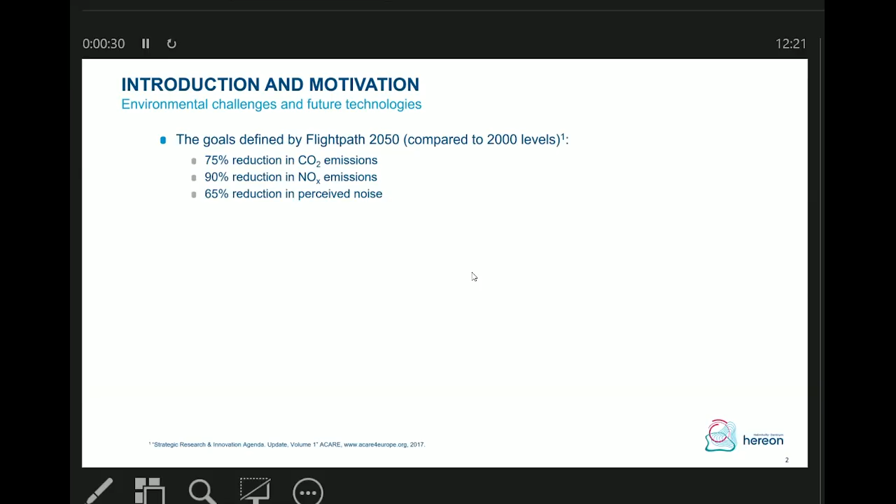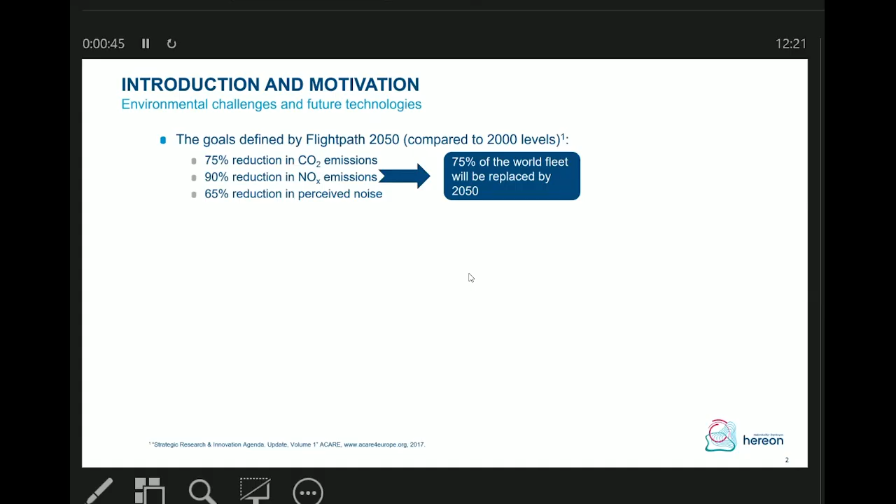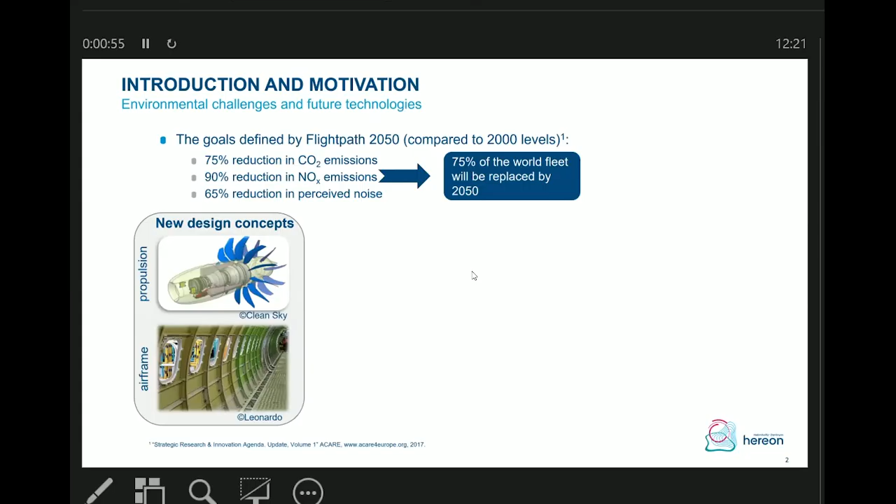One of the challenges is implementing sustainable aviation. There are goals to reduce emissions, meaning 75% of the world fleet has to be replaced by new designs for propulsion systems and airframe structures. This can be done using innovative materials with higher strength, lower density, and innovative processing technologies such as laser-based techniques for joining, additive manufacturing, and residual stress engineering.

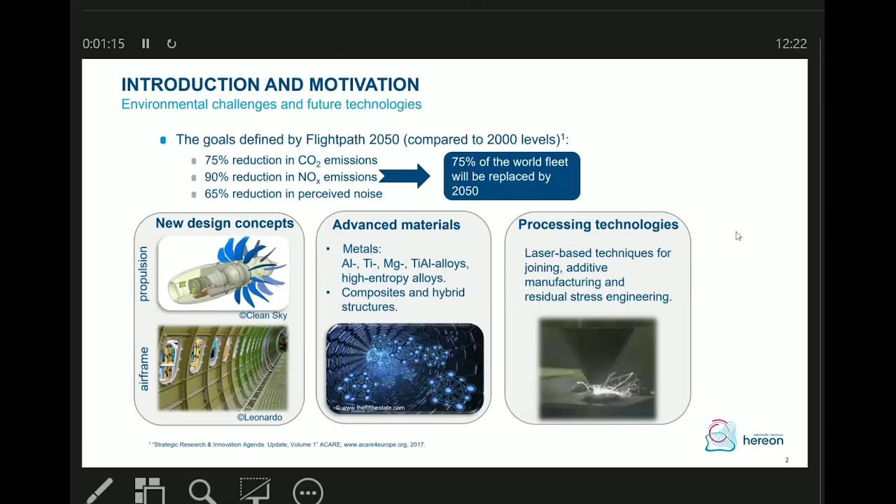And exactly, the laser processing of metallic materials is the focus of activities of my department.

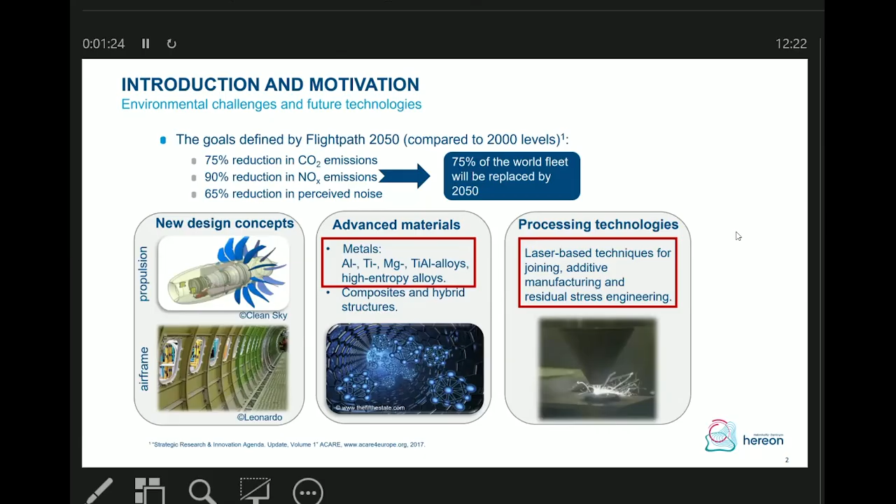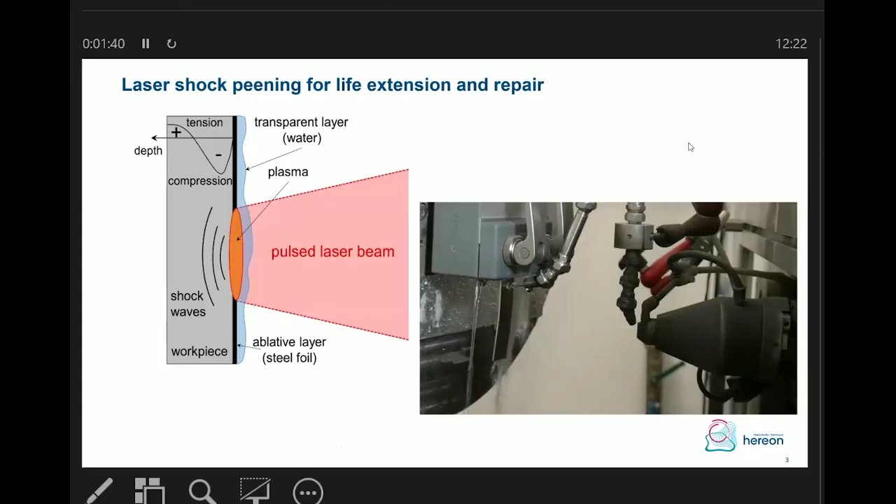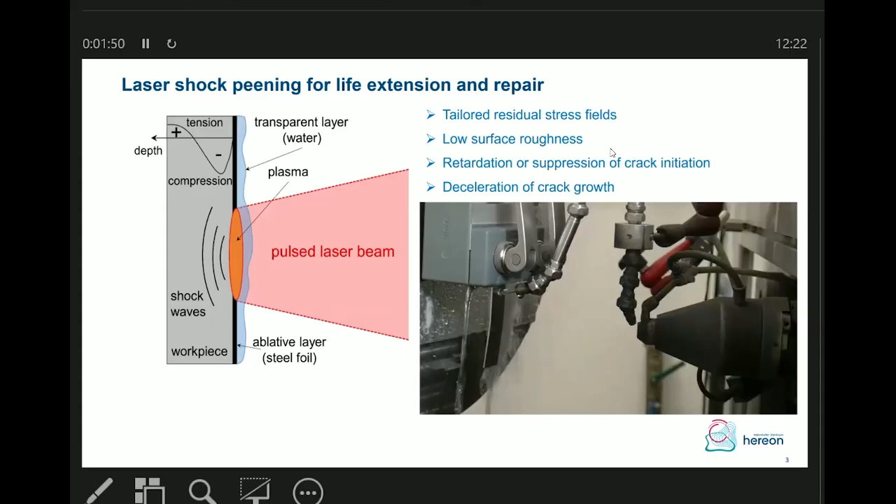The process of laser shock peening was already explained. Here is one motivation using our experimental facility. We have a high energy laser, and here is, for example, the treatment of thin metallic waste. The process can be effectively used for retardation of crack growth or retardation or suppression of crack initiation.

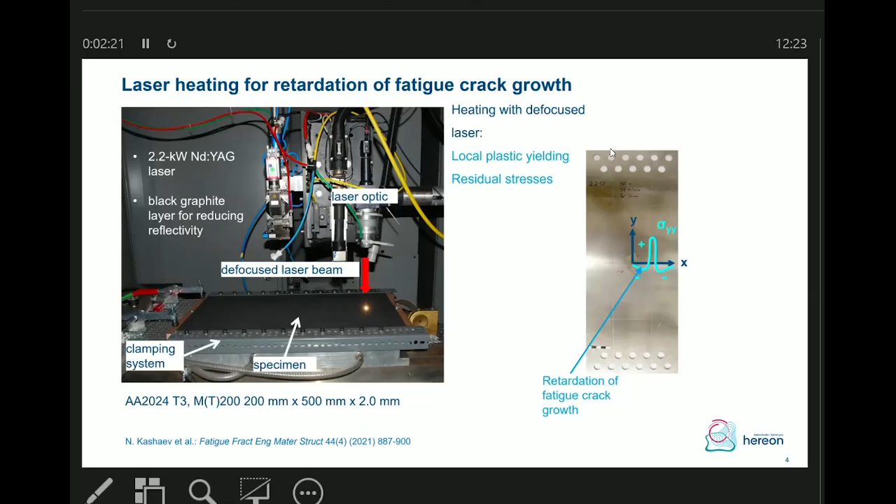The idea is to apply these processes for retardation of fatigue growth. If every manufacturing process is to be applied for industrial applications, we need reliable modeling approaches to predict the effect of the processes, to understand how we can optimize the processes, and to understand how we can implement and optimize residual stress design.

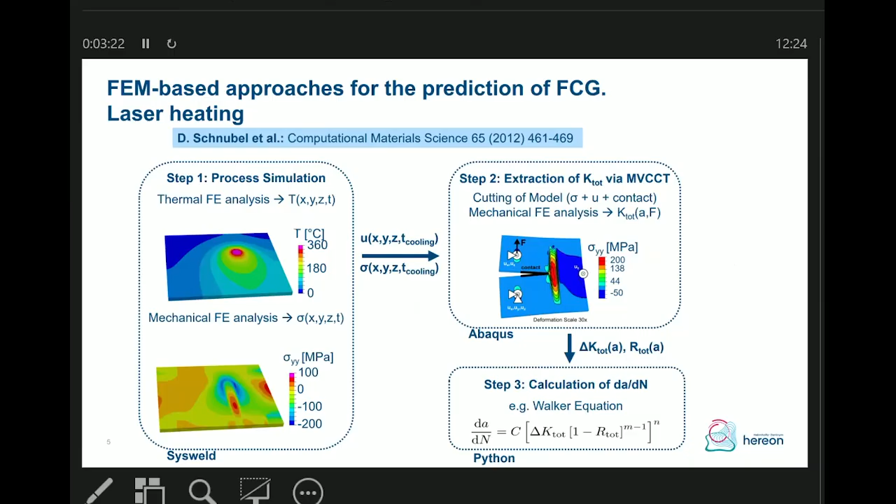With regard to modeling approaches, in principle different modeling approaches exist. One classical way, for example for laser heating, is to first perform thermomechanical analysis to calculate residual stresses. Then you can introduce residual stresses in the fracture mechanical analysis, calculate stress intensity factors, and use empirical equations to predict fatigue crack growth.

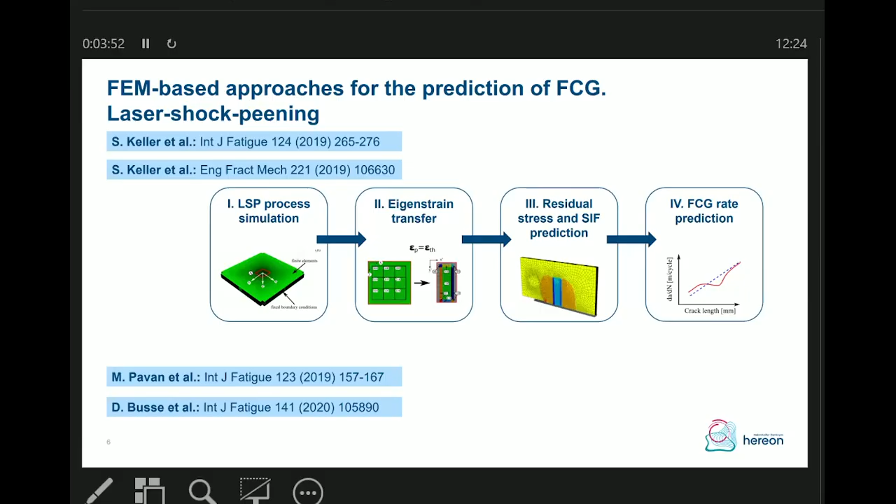For laser shock peening, a similar approach can also be implemented. However, we first have to perform laser peening process simulation, for example using the Johnson-Cook model. Then we can introduce residual stresses in the finite element model, followed by a similar fracture mechanical analysis and prediction of fatigue growth. There are some papers where this approach was successfully implemented.

However, engineers working for the aeronautical industry are interested in using commercial software such as AFGROW or NASGRO, where analytical approaches are implemented for including the effect of residual stresses. In such software, typically residual stresses are accounted for using the weight function method.

Therefore, the motivation for the current study was to investigate whether we can successfully model fatigue growth using the weight function model, the weight function approach. As application cases, we investigated both processes: laser heating and laser shock peening.

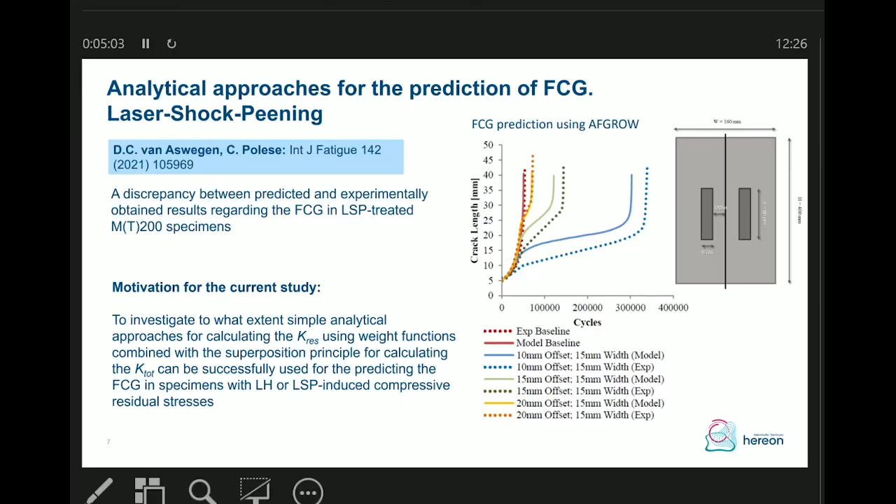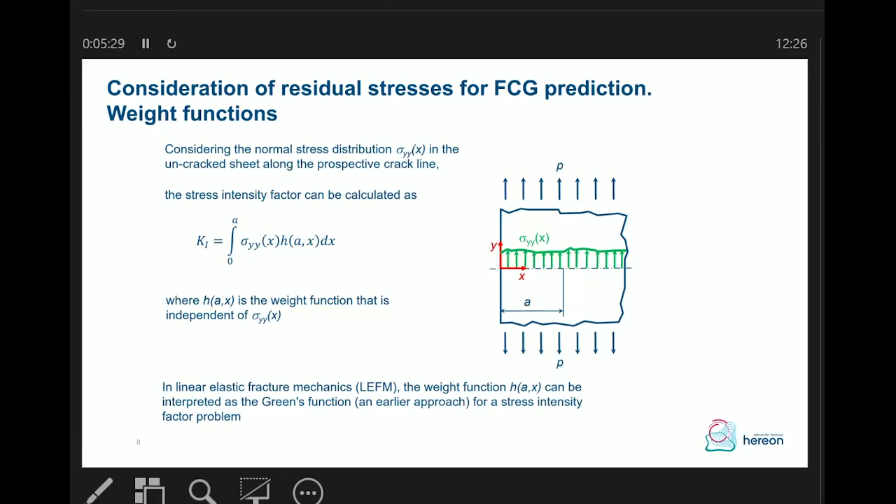The concept is in principle simple. In linear elastic fracture mechanics, the weight function can be interpreted as a Green's function, an early approach for a stress intensity factor problem. If you know, for example, the residual stress profile of the specimen, using integration we can calculate the stress intensity factor due to the presence of residual stresses.

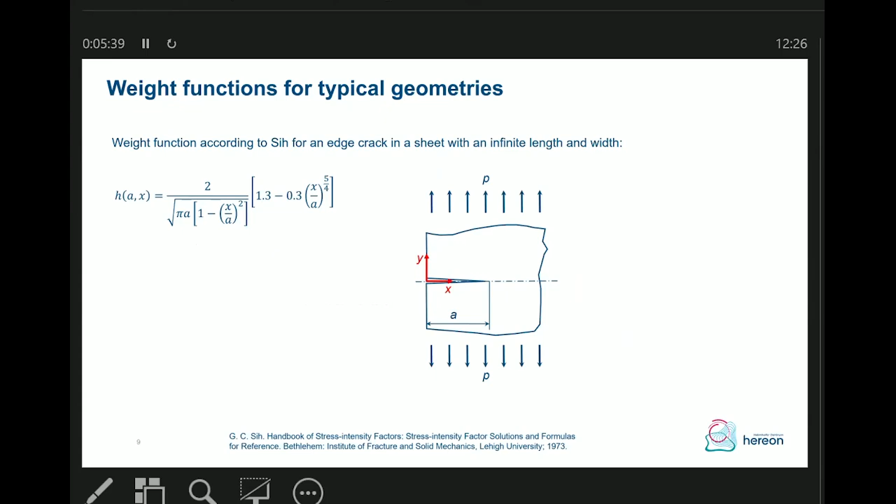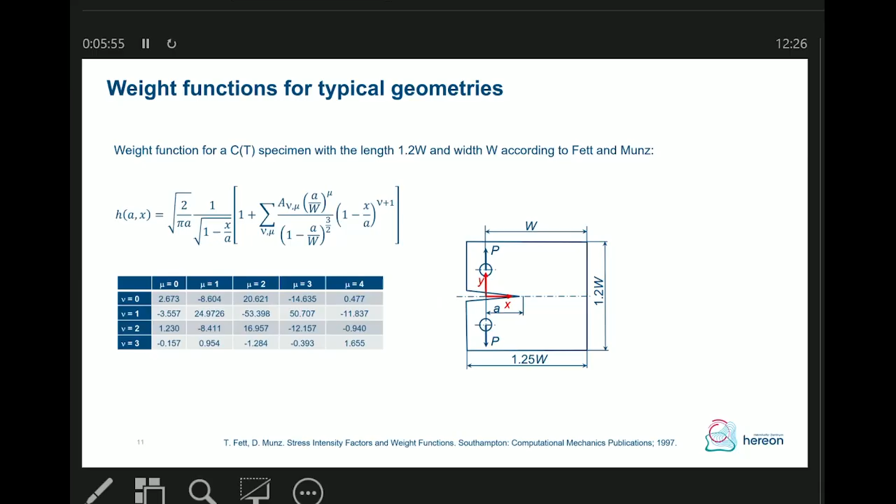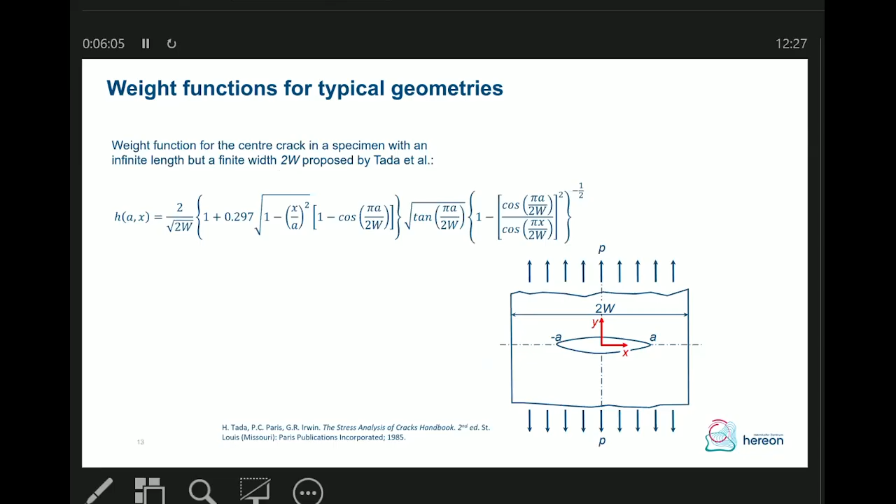There are some solutions that exist, for example for an edge crack with infinite length, we can use the solution according to Sih. For a specimen with infinite width, we can use another solution, and here for a CT50 specimen, for example, according to Fett and Munz. For a center crack, we can use, for example, a simple Green's function. If we consider finite width, we can use the solution according to Tada and others. For an MT specimen, for example, solutions exist by Wu and Carlsson.

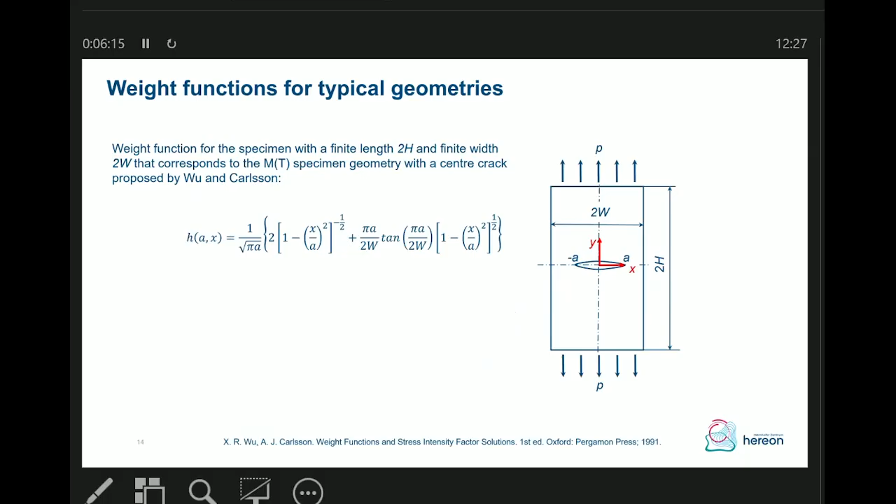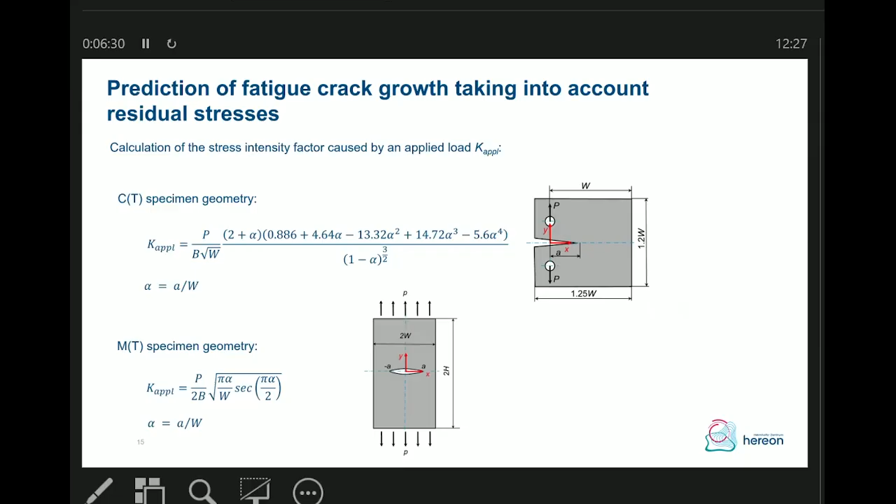How do we analytically predict fatigue crack growth? First of all, we can calculate the stress intensity factor due to applied loading. Here the solutions are shown for our cases, CT50 and MT100 specimens.

If we know the stress intensity factor, we can calculate fatigue crack growth using different equations. There exists, for example, the Paris-Walker equation, where we can also consider the stress ratio, or the NASGRO equation, where we can consider near-threshold or near-fracture-toughness behavior.

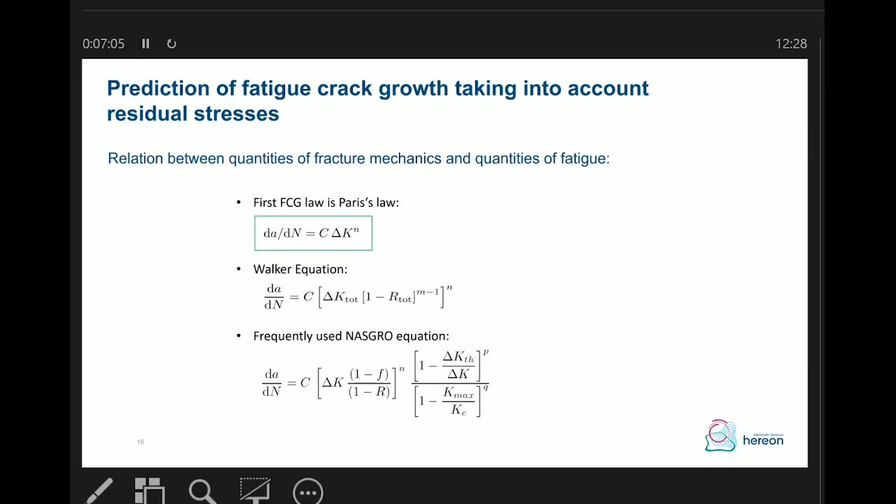As we are interested only in the fatigue crack growth, we tried to use the simplest Paris law for prediction. The question then is how to introduce residual stresses.

We followed the approach proposed by the German engineer Elber. Elber considered that we can represent Paris law using the effective stress intensity factor in order to consider the crack closure effect. Here is his approach, and we suggest there are similarities in the crack closure effect due to the presence of residual stresses.

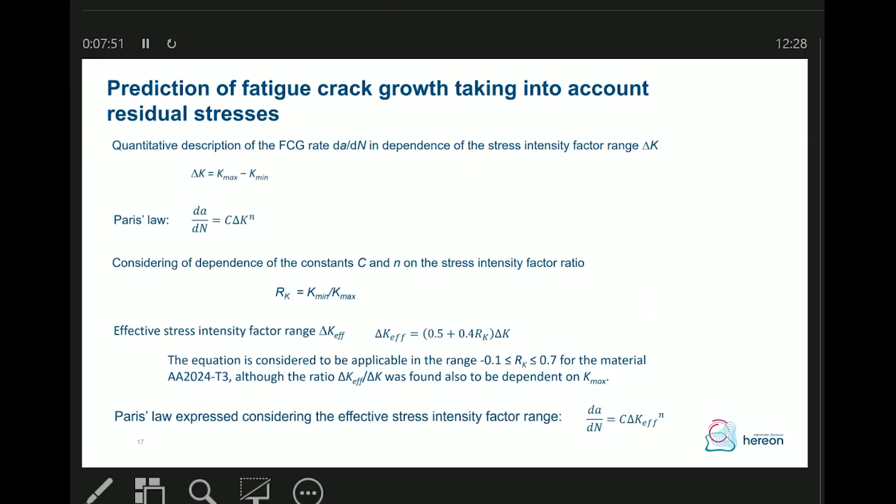In our case, if we're interested to calculate the effect of residual stresses, it's not equal to minimum divided by maximum load. It's our K tot min divided by K tot max, considering the effect of residual stresses. Residual stress intensity factor due to the presence of residual stresses, we are calculating using the weight function method. And if we have a situation that K min less than 0, we just set it to 0 in order to represent the hard surface contact. But this is not the case in reality.

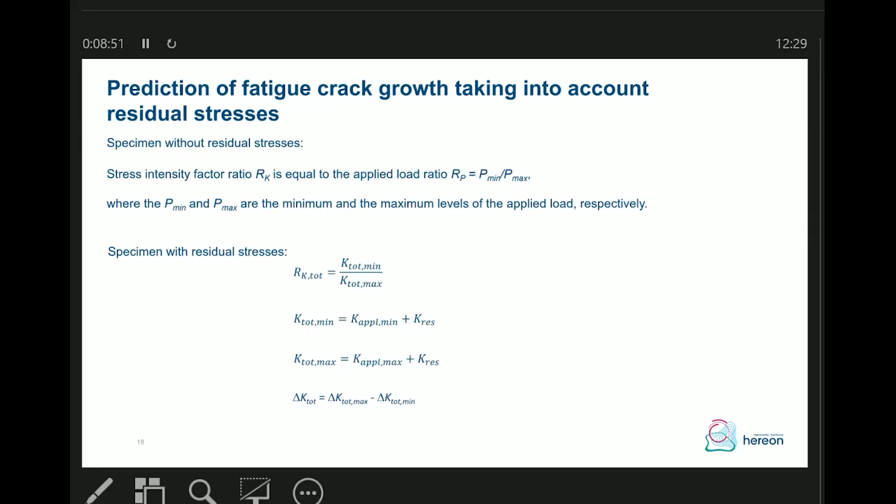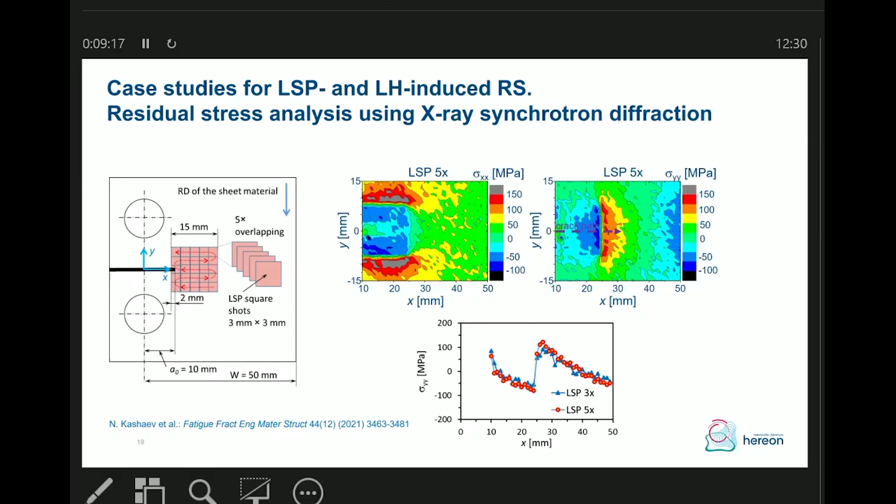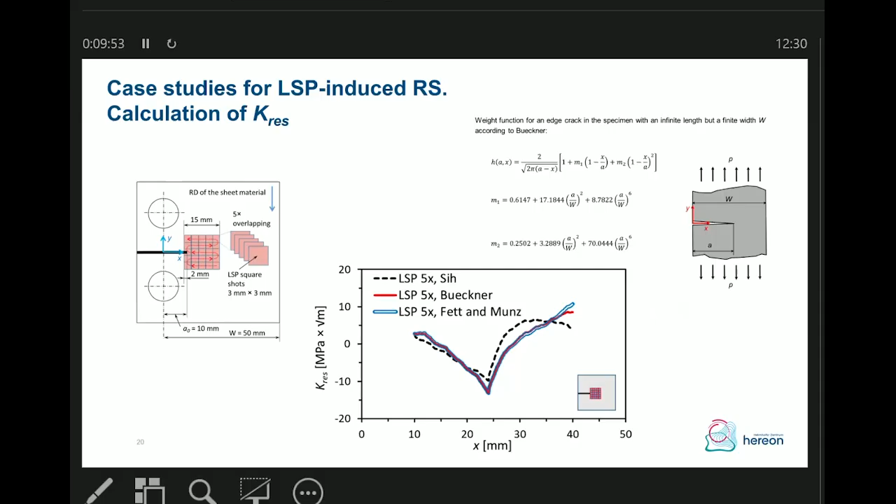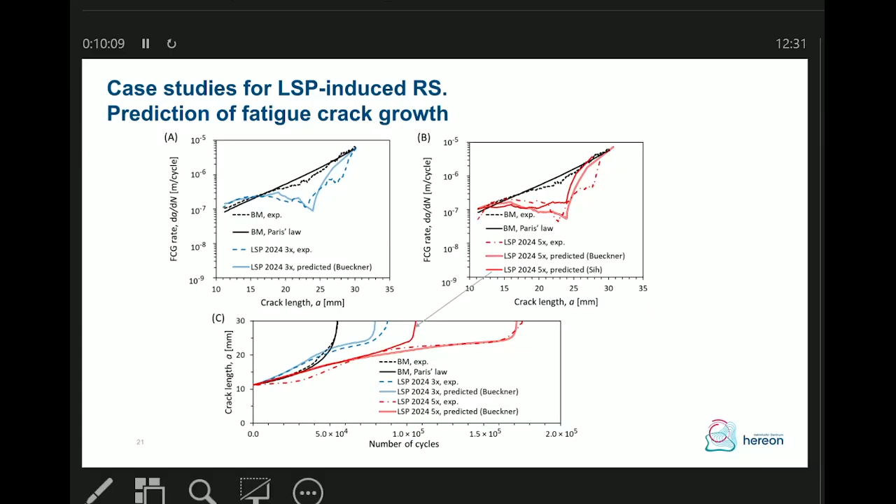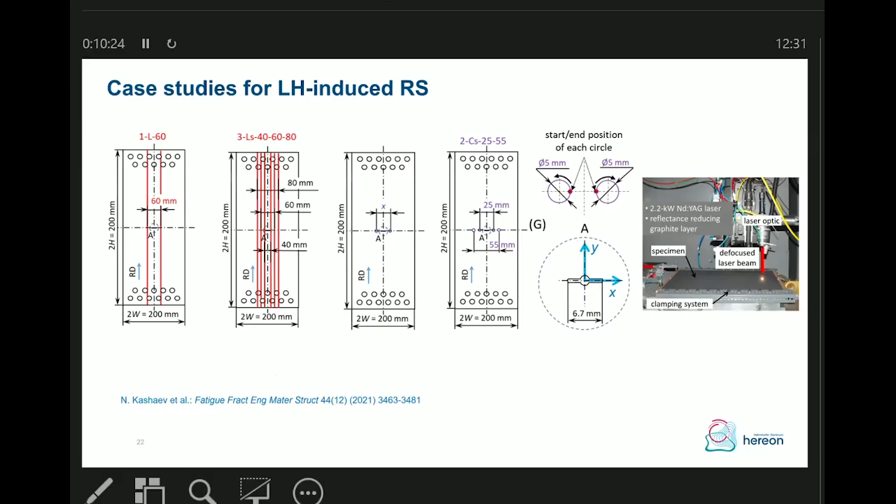Next slide. For laser heating, we investigated the M(T) specimen geometry and different application cases, applying laser heating either as lines or as circles in front of the central crack.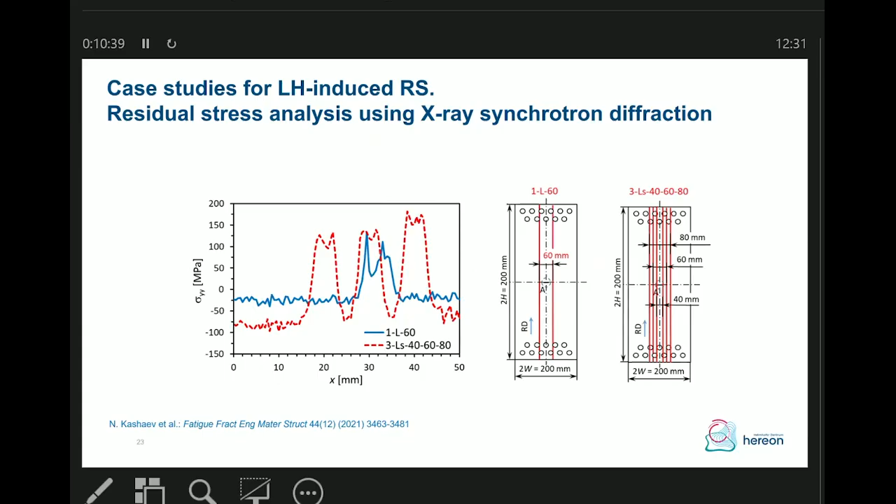Next slide. Here are the residual stress profiles, determined also using high energy X-ray diffraction, for the cases with laser heating lines. Next slide. Here are the residual stress maps, identified also using X-ray synchrotron diffraction.

Here are the profiles for the case where laser heating was applied as circles. As you can see, for some cases we also have a gradient in the y direction with regard to residual stresses, in principle in the case where we have circles. In the case of lines, we have more homogeneous residual stress profiles.

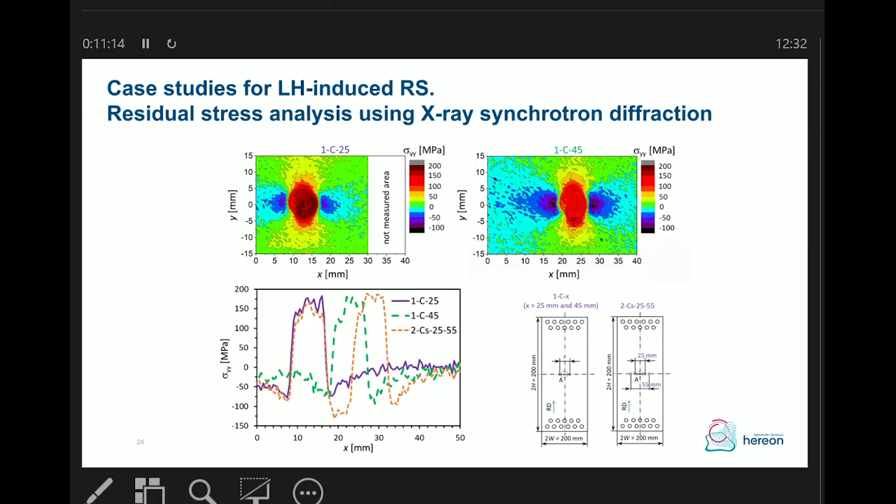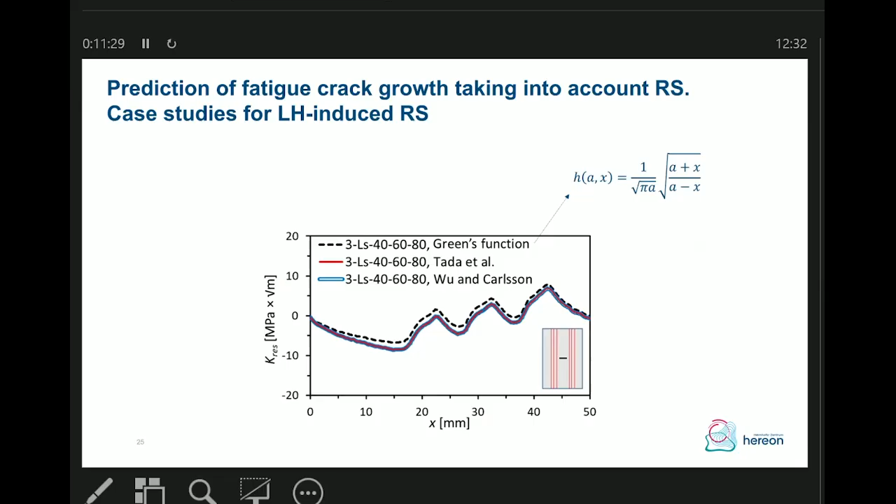Next slide. Here are the results of calculation of residual stress intensity factor due to the presence of residual stresses. Here you see we already have very good results applying the simplest Green's function.

In case of circles, sometimes we have good agreement, for example if the distance is a little bit far away, but if the distance is very close or multiple circles are applied, we have disagreement here.

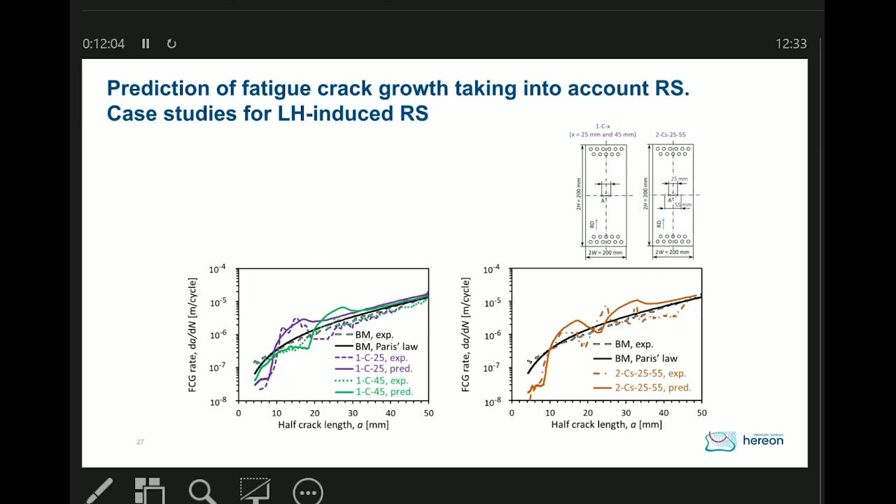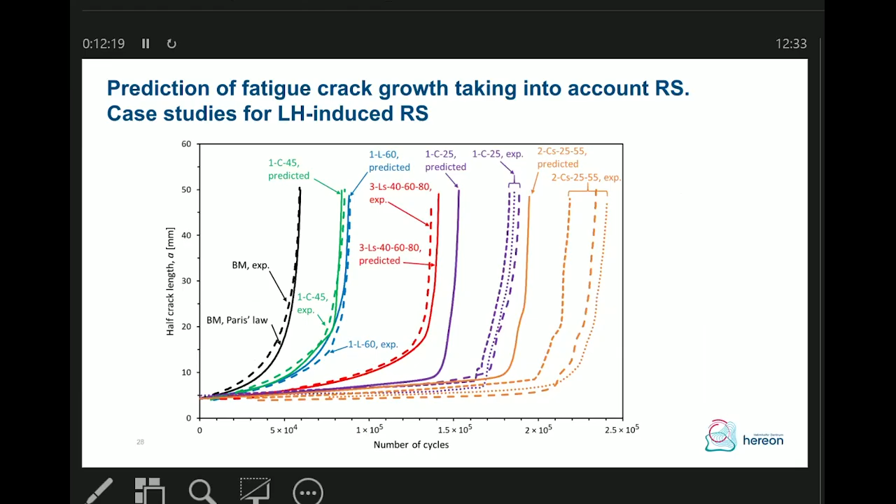Next slide, here are the results showing the predicted crack length versus number of cycles. You see, especially for circles where we have multiple circles or they are very close, we have disagreement. In other cases, we have very good agreement.

If I analyze how the crack propagates, in case of circles you see we have out-of-plane crack deviation and multiple crack branching, and this is due to the fact that we also have a gradient in the y direction. Of course, these kinds of effects are not considered by the weight function method, and they have an additional contribution to the retardation of fatigue crack growth. So far it has to be considered: if we have such effects, the weight function method cannot be applied.

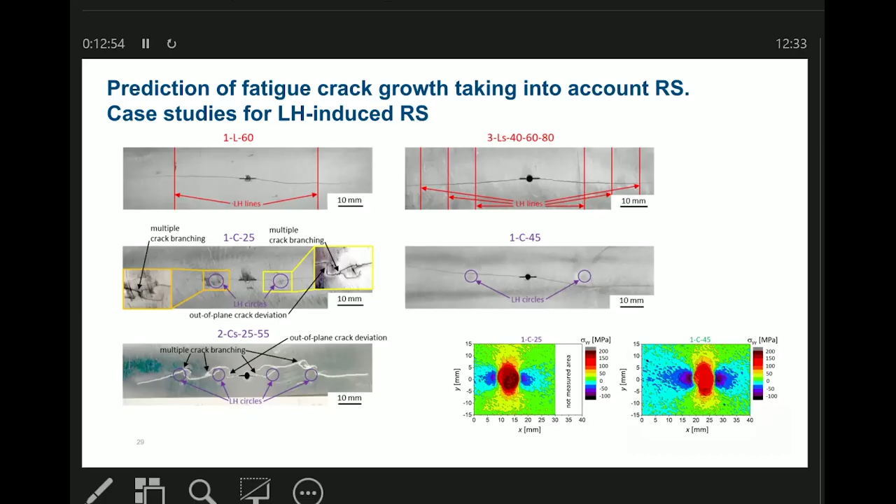One important aspect, of course, you have to consider the limitation of the method if we have an additional retardation effect due to non-straightforward propagation of the crack. For such cases, the weight function method is not applicable.